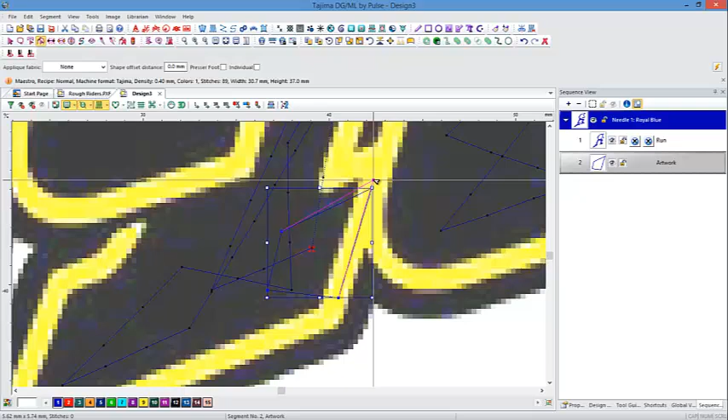So with O I can close the segment. Let's move the nodes ever so slightly over there. And once this is done, I will convert this into a satin.

For the satin elements, I will use a very tight density here, 0.20, and my purpose here is I want the inside part to be jagged and the outside part to be straight, because the needle will perforate here where you see the little dots, and this perforation with the blade will cut down the foam, and I want this to happen on the outside and not on the inside.

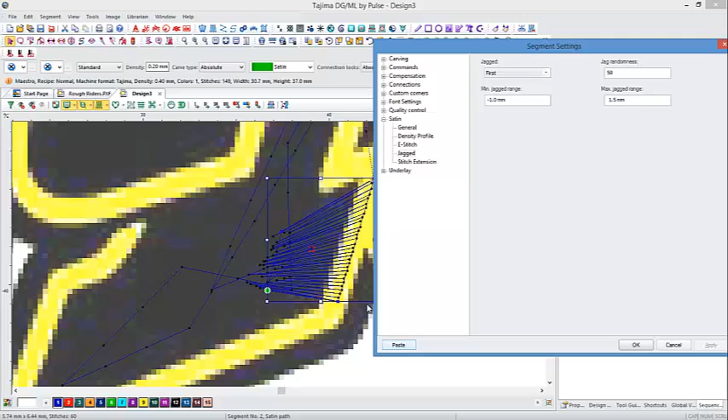So I will go into the segment properties, and here, jagged - let's find out what side is the correct one. So that was the first side, it's good, and I will limit the maximum jagged range to 1.5 millimeters. That's good. You see it sticks out of the outline that I've digitized by 1.5 millimeters, and the minimum jagged range, let's try -1. Okay, this looks good to me. You see here, perfectly jagged shape there.

So we're done with this, and let me just accommodate the start point and end point of this element. So we will travel now to the other side of the serif. I will do that with the run stitch, travel right here, and yet again I will digitize one of these triangle elements by doing exactly the same as I did before.

We close the shape, we accommodate the anchor points to the areas where I really want to have them, like so, and then I'll convert

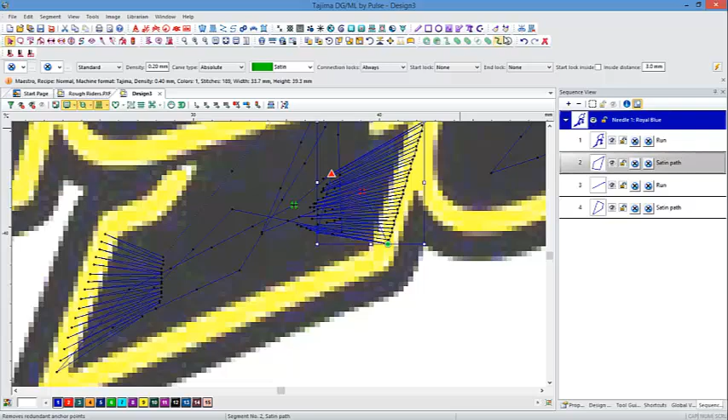this art segment into a satin segment as I did before. So we have a nice tool here called the segments painter. I select this one here. I want to copy the settings of this element, and then I will select this one here and I will paste the settings there. And you see here the jagged edge is going on the outside.

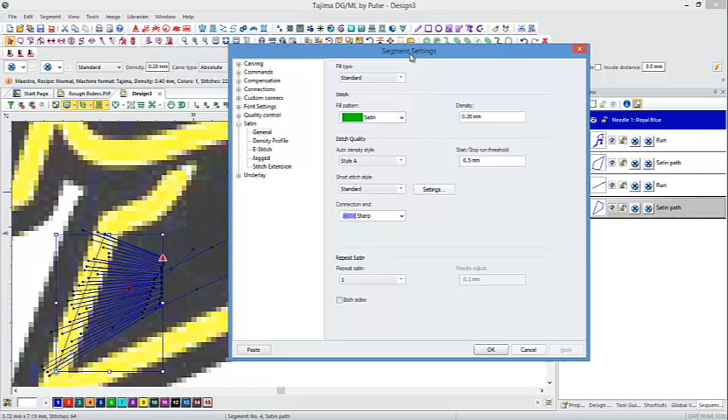That's because I drew this element the other way around. So I just need to go into my segment settings, and here where it says jag, I should change this jagged side to be the other side here. Second should be the second one.

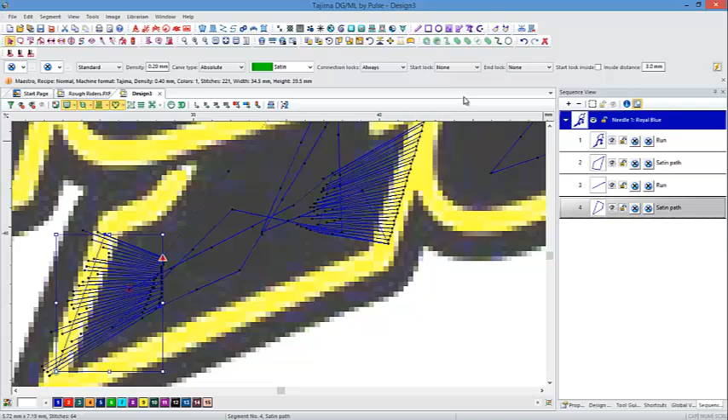Okay, so Shift X. I think I had more than one segment here set. Okay, so let's go to the second one. Right, apply. Now we're good. Well, let's now continue here with the

serif. Let me also check here the entry and exit points. Okay, they're good. So let's draw the serif part here, and here I'll draw the shape exactly as I see it here. Here we'll go and draw a little, yes, let's call this a mountain, which will compensate for the stitch overlaps. You will see that

later on when we digitize this part here on top. So you see here the shape on this side. I draw it with this little mountain here.

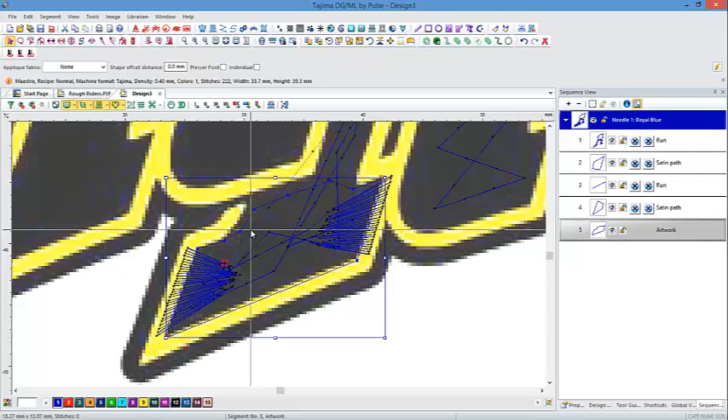Now let's convert this to satin. Place the angle lines, maybe one more here, and then we generate the stitches. So this element here also needs to have very tight density.

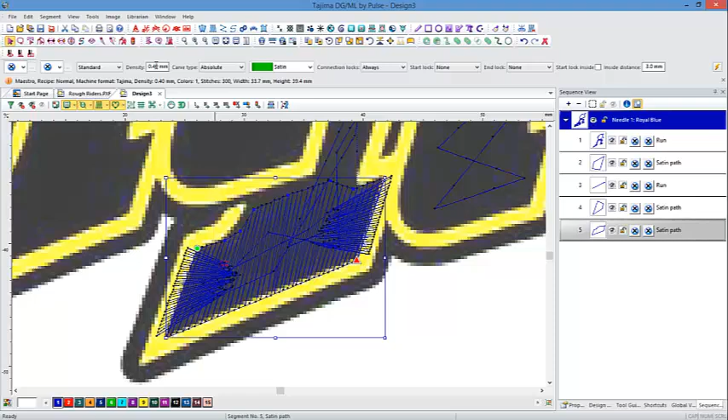0.20 is good, and let me place the exit point to a place where it will connect nicely with the next element. So the next element will be this part of the R. And zoom in here.

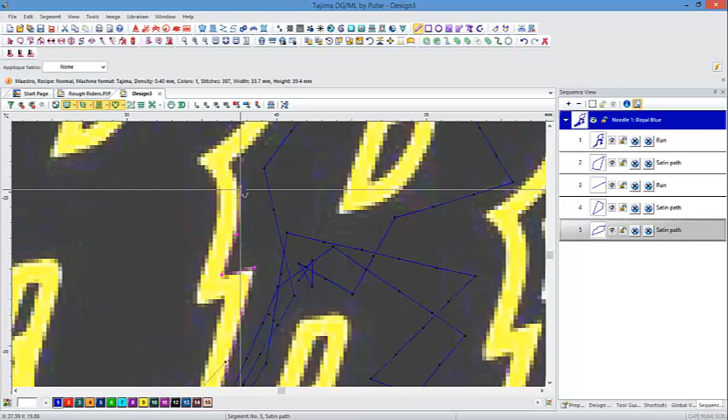I will use my pen tool again, and we will draw the shape here with simplify it a little bit here. And when we go up here, we have this little edge here, and then we come up with this spiky part.

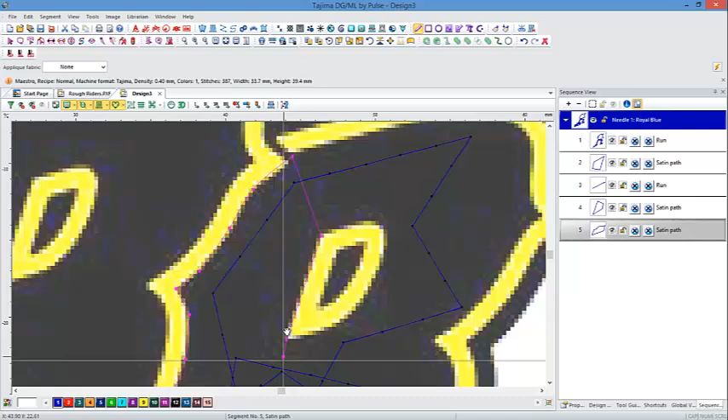Okay, I will draw it up to here, where we have this corner, and let's go a little bit further in here. And here I will also draw this little mountain that I did on the serif part below. So the stitches will actually overshoot in this area here. And here we arrive to this part.

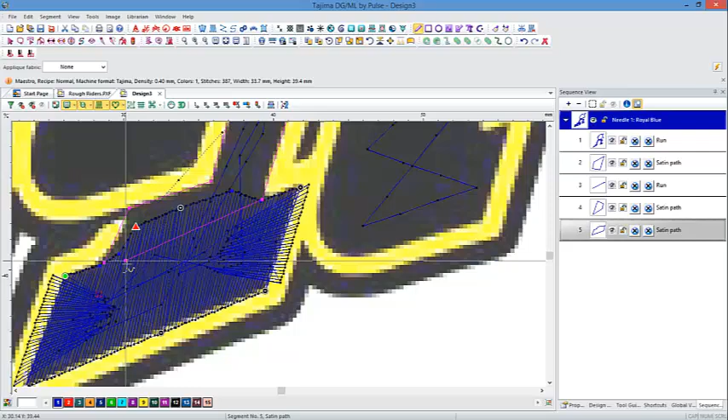So we have here particularity. I will draw the angle line, the stitches turning this way, and here, where I have this spiky part, I will need to cut this off and make it as a separate element. So let's do that with the knife tool, which is shortcut C, and we will cut this element here. Control K. We have two pieces now.

Alright, so let's take piece number 1, which is the main element, and I will convert this into satin with the stitch angles turning this way, and now we're arriving here

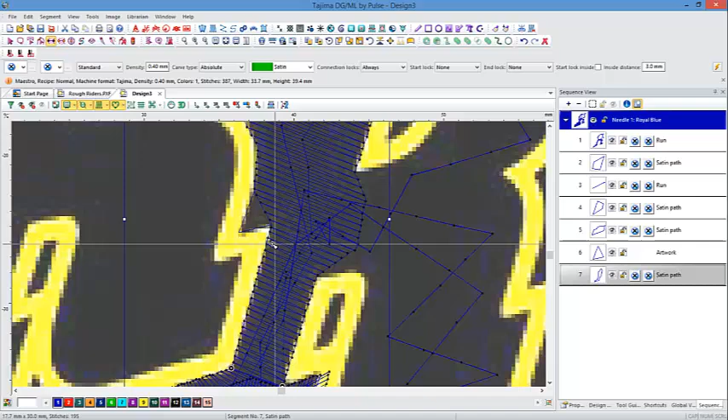behind the stitches. So here we need to place the angle line in a way that it will perfectly line up with the triangle part here.

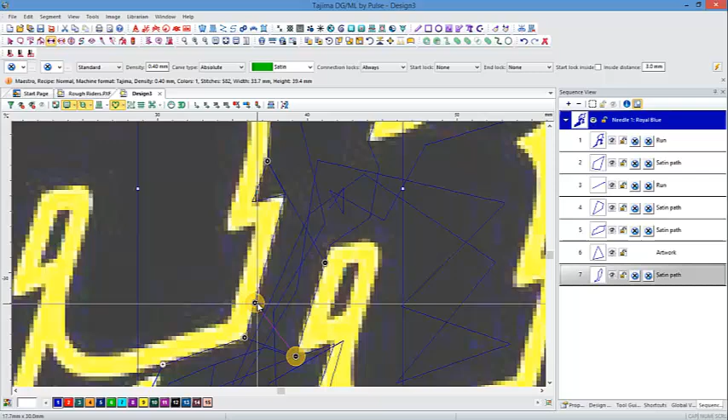So we have using quite a strong twist here. Let's change this here, stitch angle. So now here we're starting to change the direction towards the end.

Let's have a look how this looks like. See here we need to accommodate this a little bit better, like so. Okay, getting there.

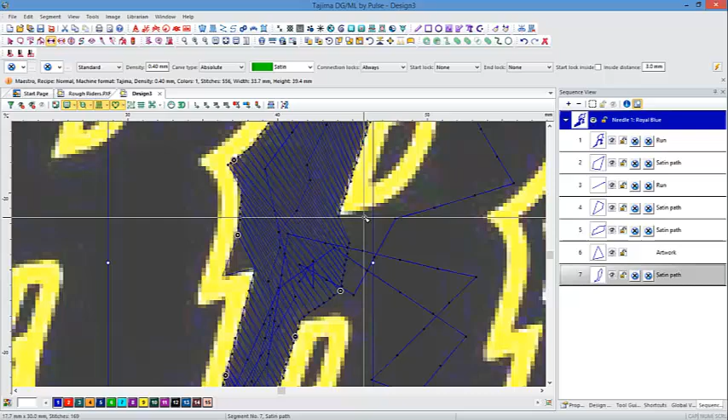Okay, so now we need to set the same settings as we have here in this serif part. So I'll use my settings painter, select copy, and then select this part and paste. There we are. Good. The exit point of this part, we place it there.

And now we will travel down with running stitches to this part here. So let's use the run stitch tool to do that. We travel straight down here. And let's zoom in this part.

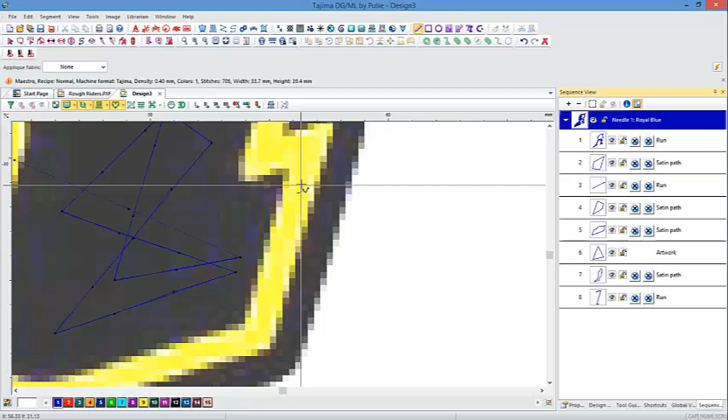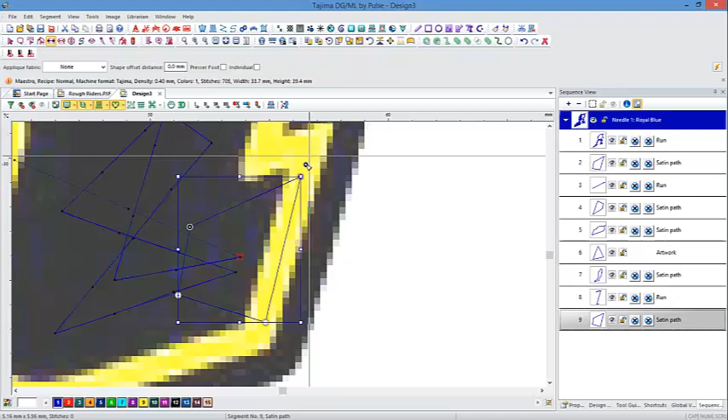As we already know, this is an open serif here, so I will draw my triangle like so, and then with the anchor tool, okay, this is good, and then place angle lines, basically convert this art segment into a satin stitch. Okay, we're good here.

So the only thing we need to do is with the settings painter, I copy this again and paste. Perfect. So let's place the start point here and the exit point there.

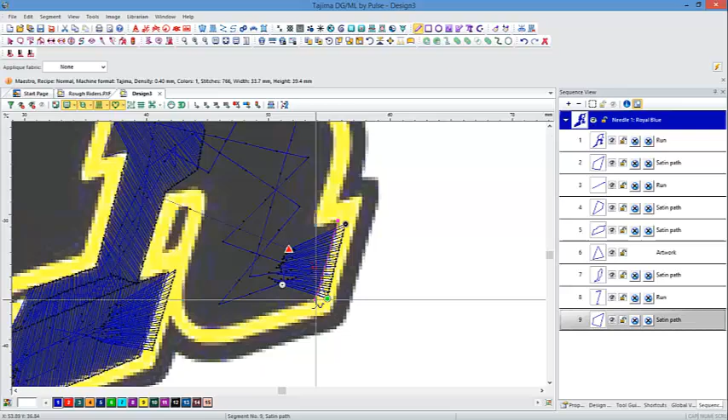And yes, so we will now draw the main shape here. Come here with curve points. Then we come up here. Here I will, since this is on one piece here, I will draw by doing the overlap here.

Okay, here we turn the tool into curve, and here we have line, curve, line, and then we'll close the shape here. So we're good here.

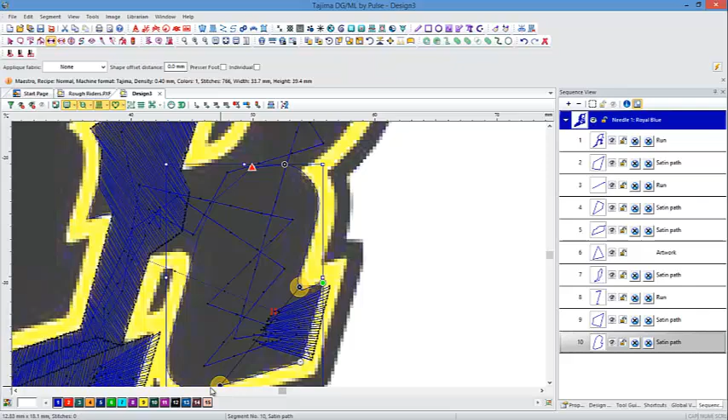We convert this part now into satin. The stitch angle here, and here we are starting to turn the stitch angle. Let's place this one here. Stitch angles going this way.

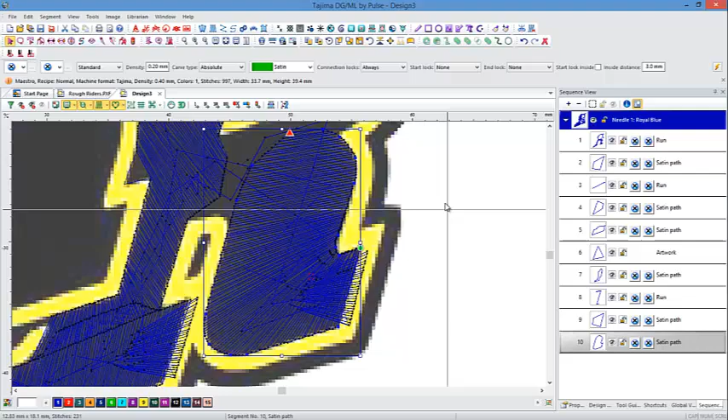Alright, and again we will select one of the segments of the main part to use the segments painter. Copy and paste. Start point here, exit point there. Perfect. And the last part is this one here.

So let's hide the stitches, we have a better view of the shape. And let's start to draw here with this curve here.

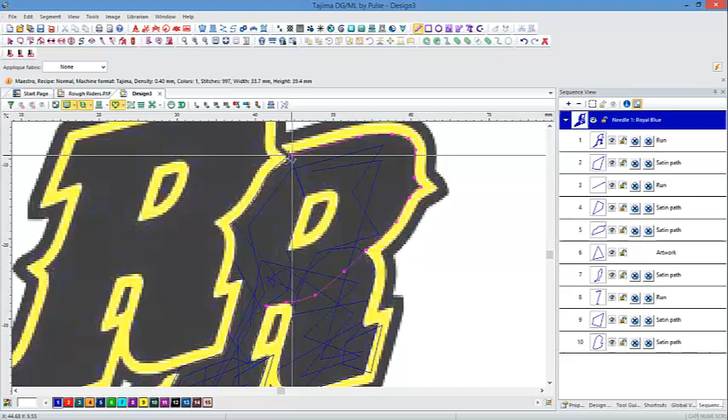And here we have curve points. Here we turn to a line, and let's do a little overlap here, basically overlapping to make sure that we will not end up with a gap. Here we have some curve shape, and here we turn to straight again, and at the end we use the O on the keyboard to close the shape and select it.

Let's hide the image, press D so we can convert this part into a satin segment. Here I will place an angle line here and then make sure that stitches are turning this way, and here stitches turning that way.

Okay, so we are good here. Let's have a look at the image beneath. Maybe I will move the anchor point here ever so slightly to make sure that we cover this part here well.

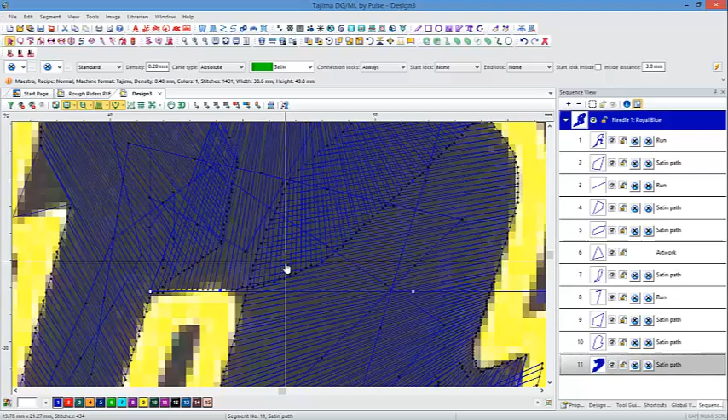Okay, we're good here, so I select this segment here, and again with the segments painter, copy and paste, so we end up with the same segment settings. So let me see here the stitch angle. I like to have the stitch angle in such areas so that they nicely match, or they match well.

So I select this segment here, and to change the stitch angle here slightly, so it ends up like this. Here as well. Let's see how this ends up. Okay, you see here stitch angles are getting better from one side into the other side.

Let's have a full view of what we're doing so far. Good. 3D. Let me check whether the start and end points are good here. Yes, that looks fine so far.

Let's hide the image. Oh, you see, we forgot to punch this little part here, so I'll do that right now, using the angle line tool, and I have this little satin element here.

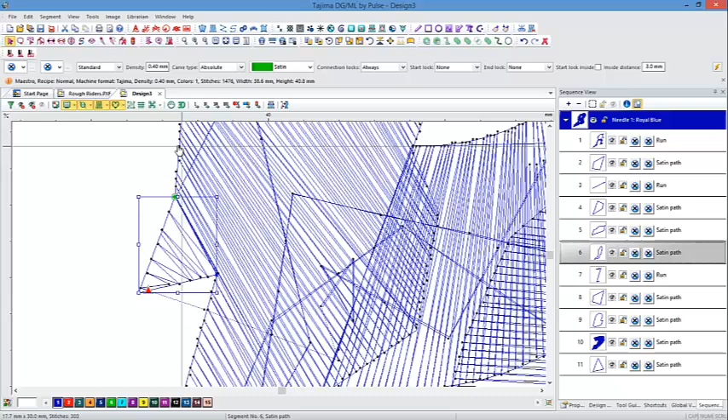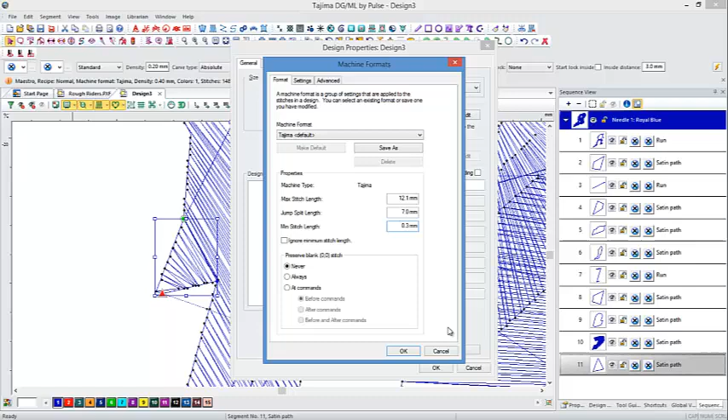Okay, so we need to make sure that this little part ends up with the same settings as the other ones. Good, here you see some stitches are being filtered out, so let's make sure that we have the minimum stitch length. Maybe reduce this to 0.3 millimeters. Let's see how this ends up. Yes, see, it's generating without filtering too many little stitches.

We need them in order to perforate, cut the foam. So this part should be a branch of number 6 here. Alright, so let me move this together. I select both, and then with Control L, which is branching, I will end up with the correct part here. So we only need to move the exit point to the correct location, and then we should be fine.

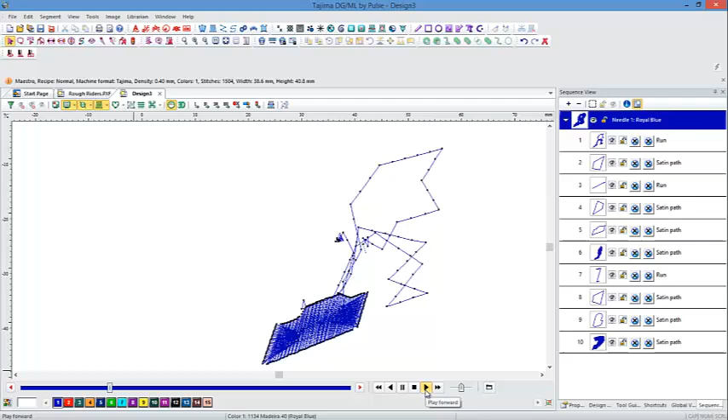Let's have a look with the slow redraw we have been doing so far. Okay, Shift X to hide the outlines. Alright, so it looks good to me here, and this is a small explanation how to deal with designs that are being used for puff foam.

The important part is that you have the parts that are ending up with very open wide satins here and here, like in the serif, that you pad them down with these triangle elements here, because the foam will otherwise stick out here. Alright, that's the intention, to cut the foam here in this area by placing that element that will perforate the foam perfectly, like so.

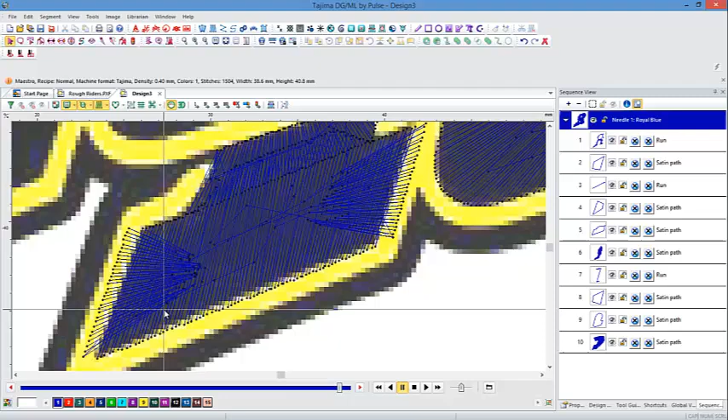And the reason I'm sticking them out a little bit is because the stitches here from the serif will push out anyway, and the stitches of this part here from the triangle will push in a little bit. So at the end of the day, this will cover up and end up very nicely.